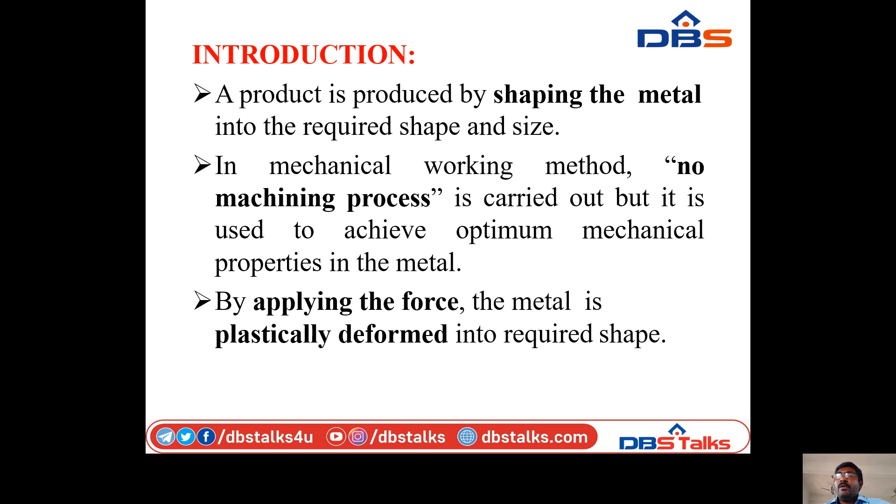By applying the force, the metal is plastically deformed into required shape. This deformation takes place when the stress caused in the metal reaches the yield point. The mechanical working reduces the cavities present in the metal and is also used to remove the impurities. The wastage of material removal is negligible or too small, and production is high when compared to other manufacturing processes.

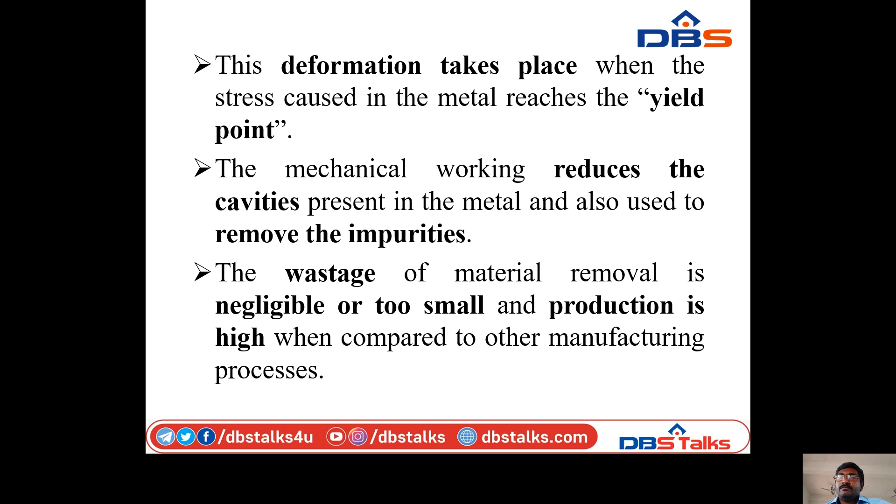Plastic deformation. If the solid body is loaded beyond the elastic limit, the body will experience a permanent change in shape and size when the load is removed. Plastic deformation of metal and alloys is generally studied under two categories, namely plastic deformation of single crystals and plastic deformation of polycrystalline materials.

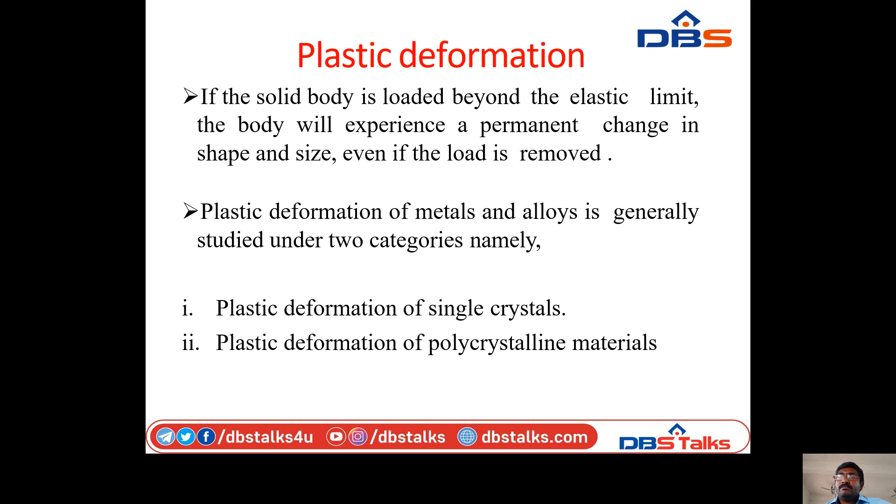So, plastic deformation of single crystals. Plastic deformation of single crystals involves the study of one single crystal and observing how it behaves under stresses. A single crystal is nothing but a single grain and has no grain boundary. Plastic deformation in single crystal may take place by slip, twinning, or a combination of both.

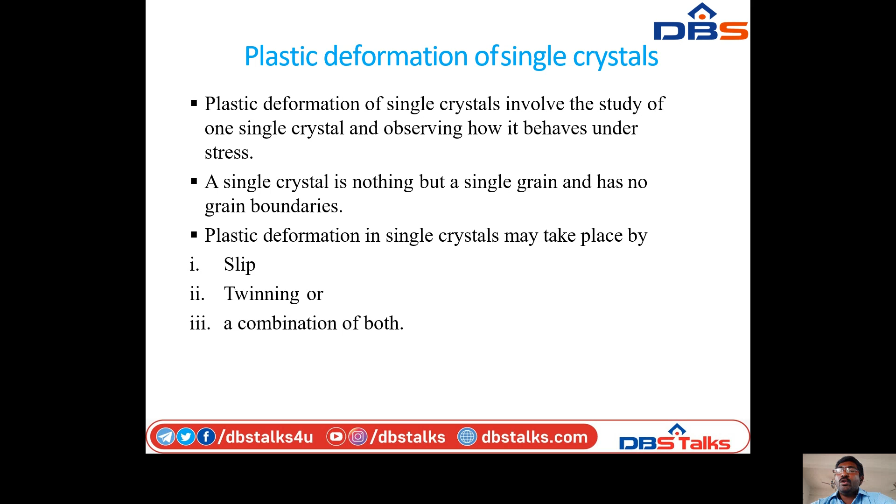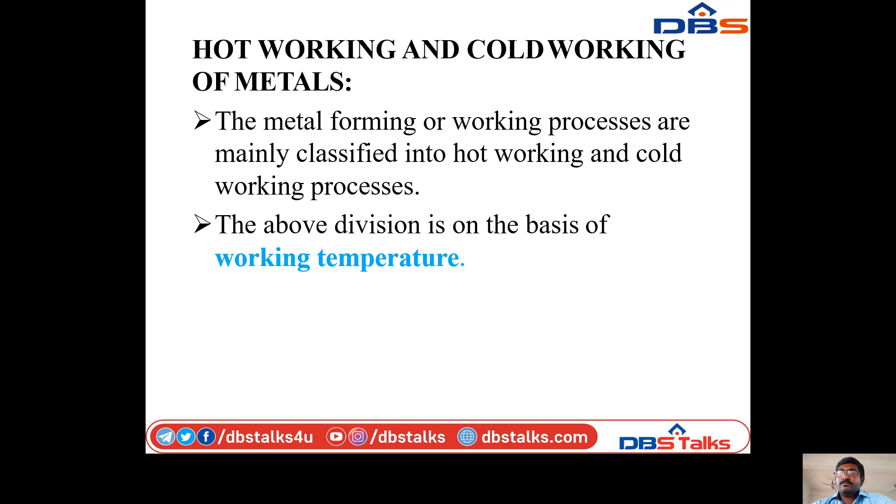Next, hot working and cold working of metals. The metal forming or working processes are mainly classified into hot working and cold working processes. The above division is on the basis of working temperature. Hot working of metal. The mechanical working of metal above the recrystallization temperature but below the melting point is known as hot working of metal. The recrystallization temperature of metal will be about 30 to 40% of its melting temperature.

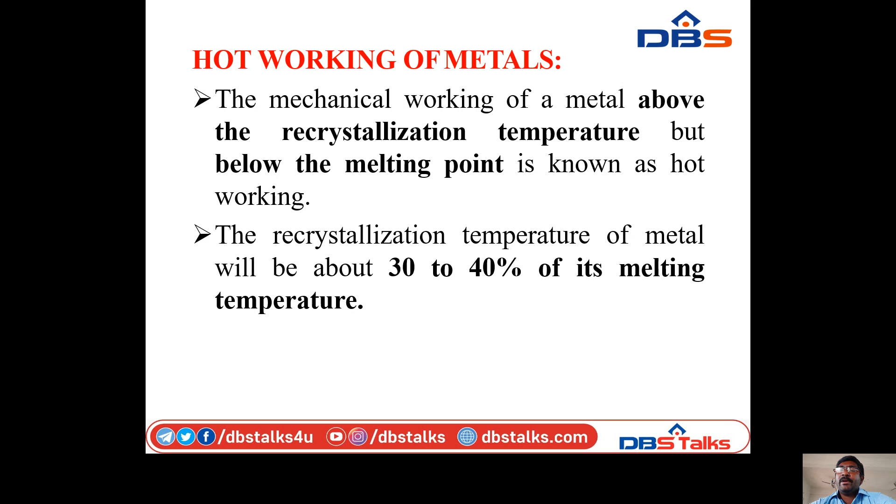So, hot working of metals, you can see the figure. So, grain size will increase in the hot working process. The increasing temperature is 1000 degrees centigrade. So, the diagram gives grain size and recrystallization temperature.

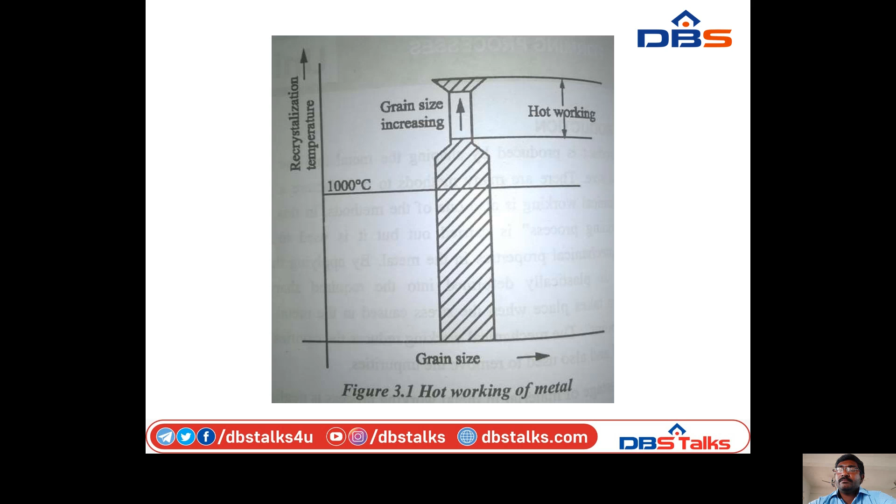So, semi-hot working or warm working. The drawbacks of both cold working and hot working processes are eliminated by this method of working. In this method, the metal is deformed under controlled conditions of temperature and strain rate. The ductility, tolerance, and yield strength factors should be considered for the selection of temperature and strain rate.

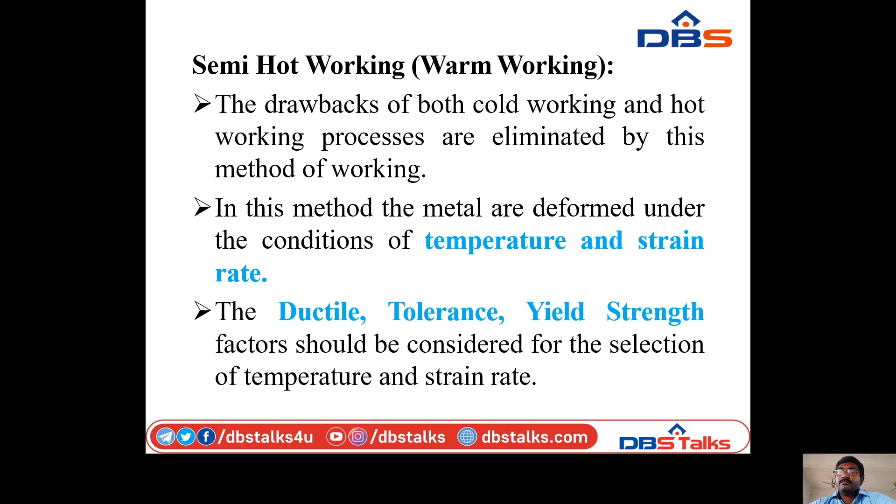The advantages of hot working. Force requirement is less when compared to cold working process. Toughness, ductility, and resistance can be improved. Quick and economical process. Porosity is eliminated and density of the metal is increased. It is suitable for all metals.

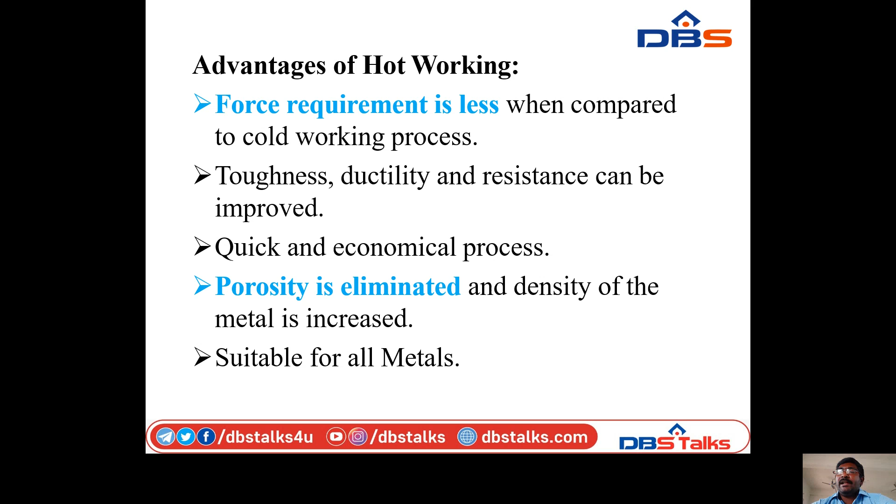Disadvantages of hot working. Surface finish may be poor, close tolerance and automation cannot be achieved due to high working temperature. Tooling and handling costs are high. Sheets and wires cannot be produced.

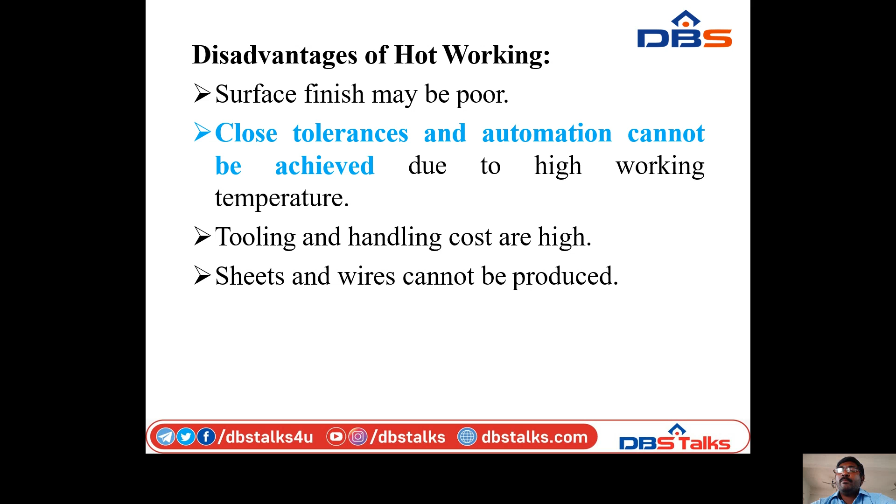Next, types of hot working process. Hot forging. It can be defined as a metal shaping process in which a malleable metal part known as billet or workpiece is worked to a predetermined shape by one or more processes such as hammering, upsetting, pressing, and so forth, where the workpiece is heated up to about 75% of its melting temperature.

So next type, hot extrusion. It is a production process used to form special steel profiles with a constant longitudinal cross section. It acts through a force called compression. This process can be employed to manufacture solid or hollow profile bars with complex geometry and fixed cross sections in a single step.

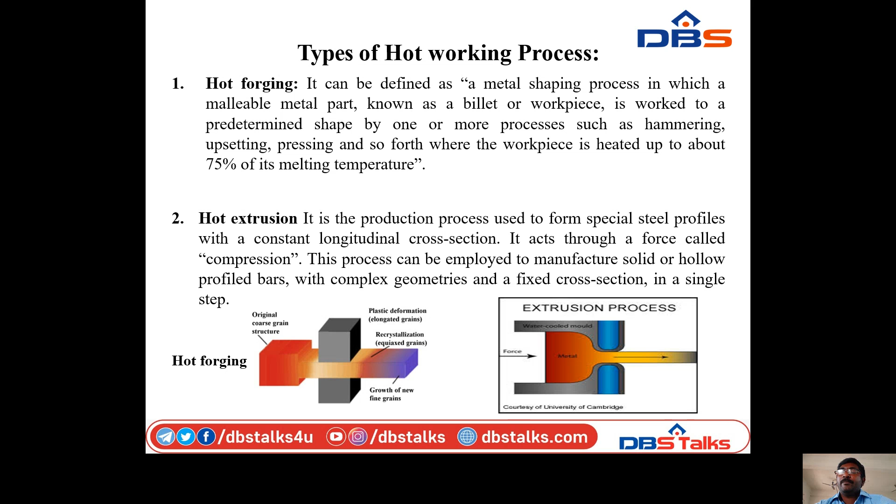Next, drawing. It is a metal working process which uses tensile force to stretch metal, glass or plastic. As a metal is drawn or pulled, it stretches thinner into a desired shape and thickness. For wire, bar and tube drawing, the starting stock is drawn through the die, is reduced in diameter and increased in length. So you can see the figure.

Next, swaging. It is a forging process in which the dimensions of an item are altered using dies into which the item is forced. Swaging is usually a cold working process, but also may be hot worked.

Hot spinning. It involves spinning a piece of metal on a lathe while high heat from the torch is applied to the workpiece. Once heated, the metal is shaped as the tools on the lathe press against the heated surface, forcing it to distort as it spins.

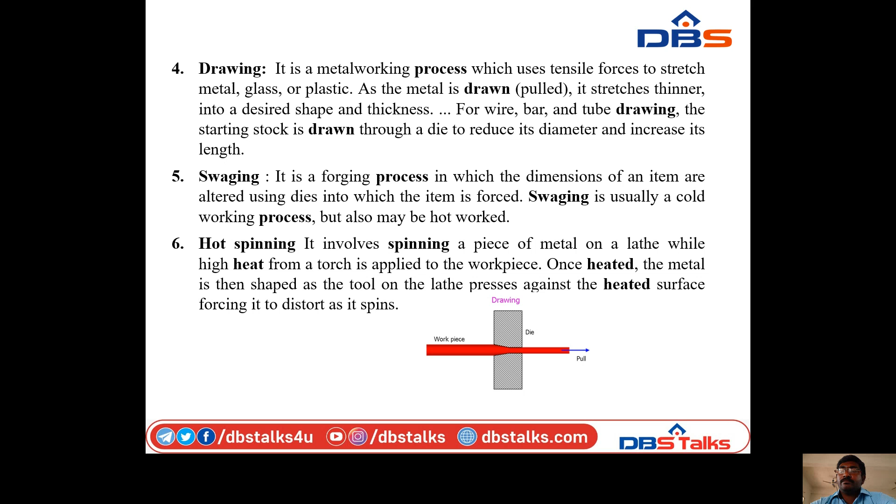Next, cold working. The plastic deformation of metal to the required shape being performed below the recrystallization temperature is known as cold working process. The recrystallization temperature is about half the melting temperature, but generally cold working is carried out at room temperature.

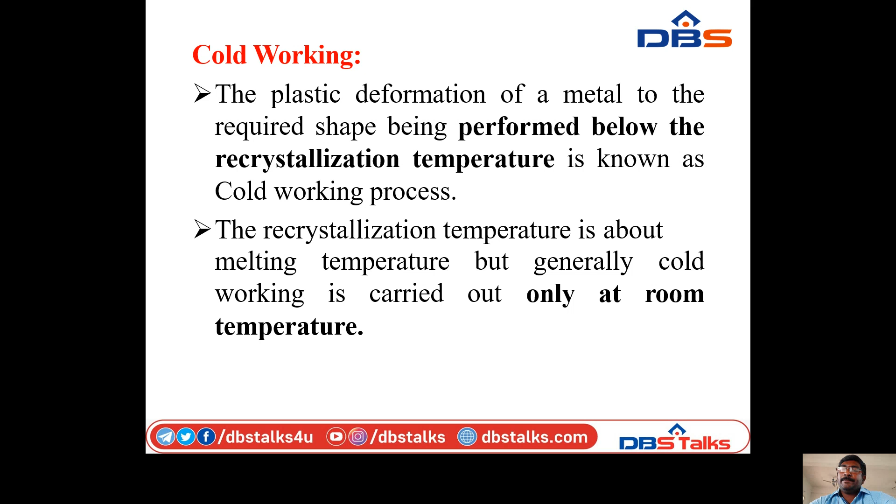So we can see the figure. Elastic deformation, plastic deformation, and load on the vertical line. Deformation is on the horizontal line. So you can plot a graph of yield point, maximum load, cold working, fracture.

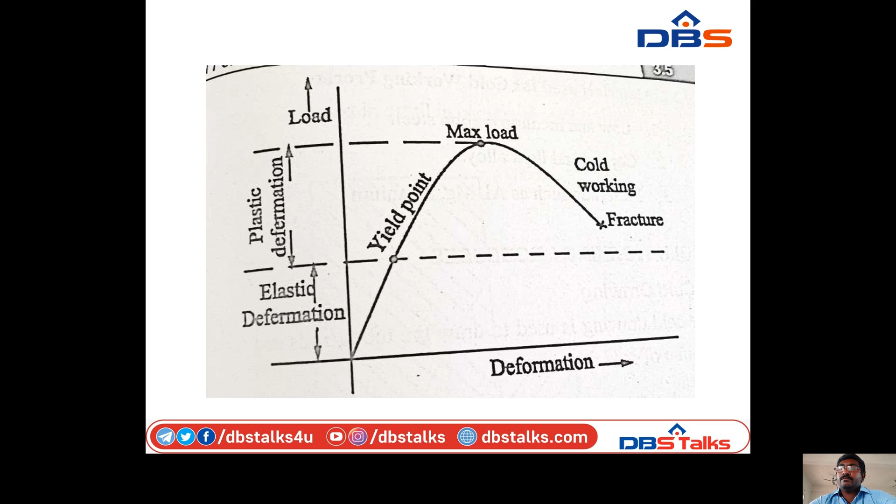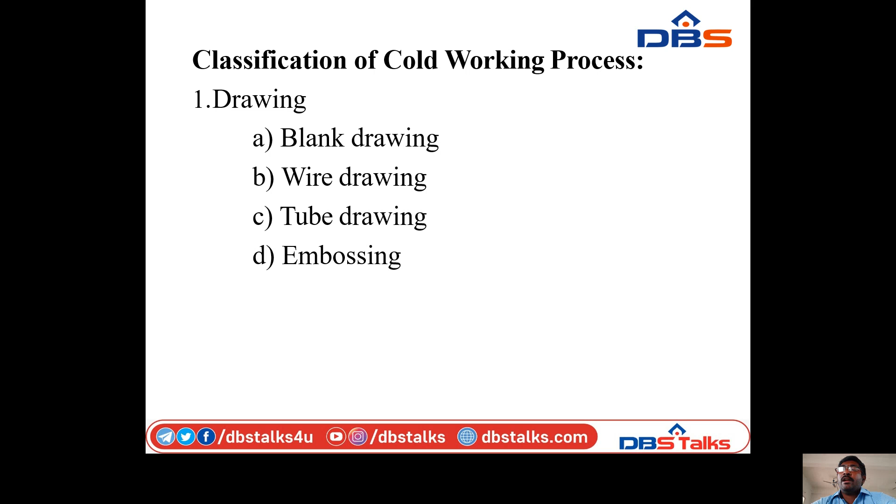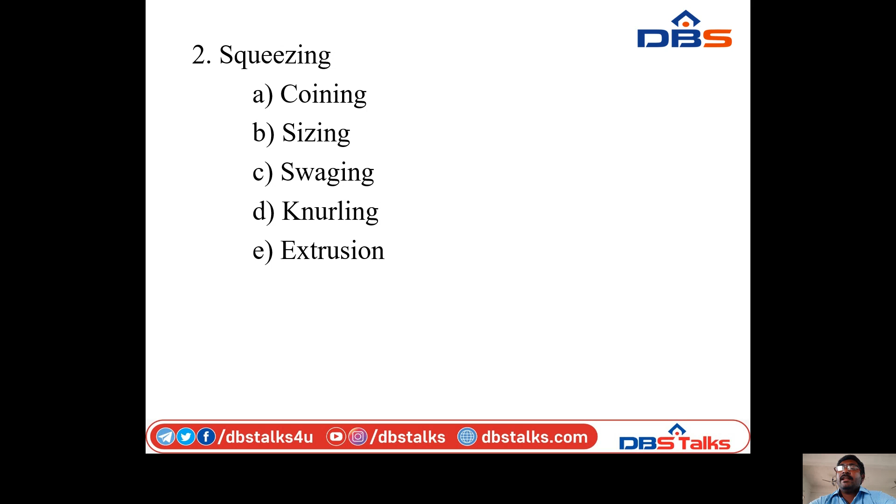The classification of cold working process. The drawing process. In drawing, we can divide it as blank drawing, wire drawing, tube drawing, embossing. Next, squeezing, coining, sizing, swaging, knurling, extrusion, bending, plate bending, roll forming, angle bending, seaming.

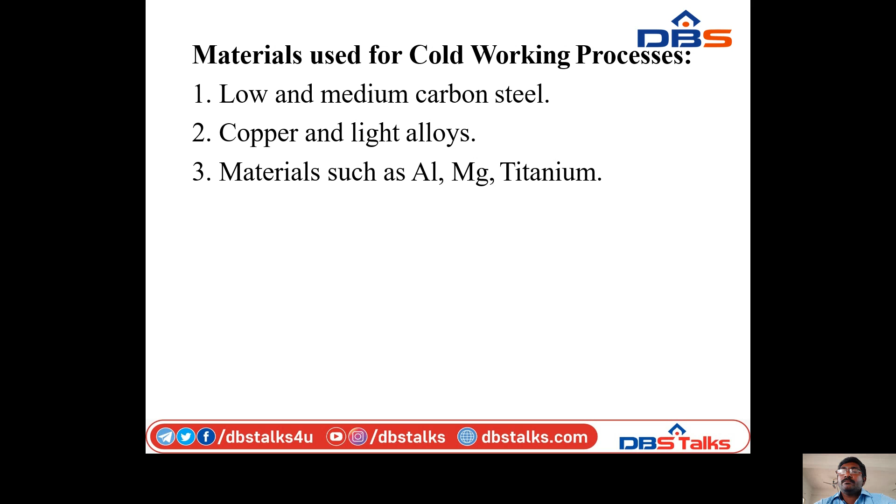So metals used for cold working process. Low and medium carbon steel, copper and light alloys, materials such as aluminum, magnesium, titanium, etc. Next, advantages of cold work. Widely applied as a forming process for steel, better surface finish is obtained, provides higher dimensional accuracy, thin material can be obtained, it's suitable for mass production.

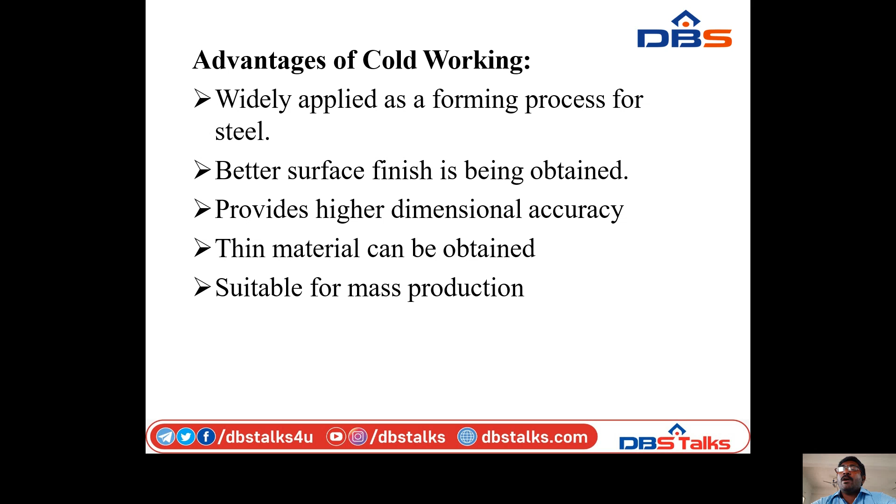Limitations. The surface finish may be poor, close tolerance cannot be achieved, stress formation in the metal during cold working is higher.

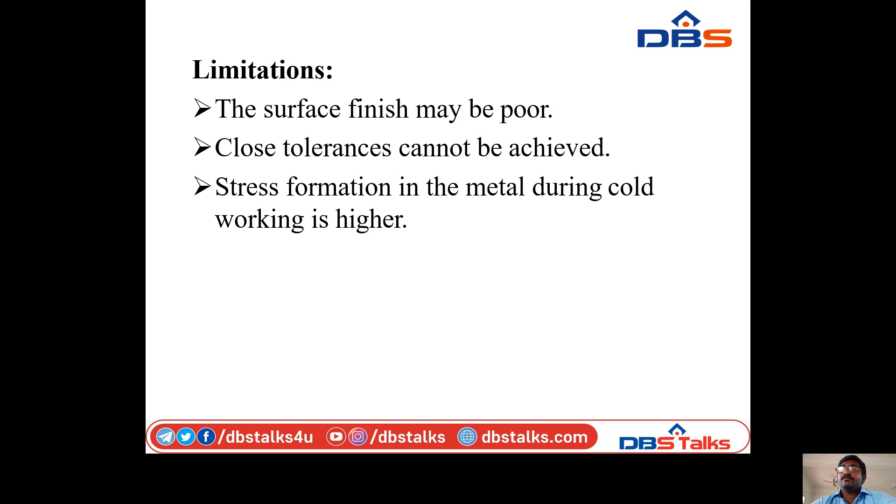Comparison between hot and cold working. Working above recrystallization temperature is the hot working process. Below recrystallization temperature is the cold working process.

New crystals are formed after hot working, but no recrystallization occurs in cold working. Hot working hardens the metal, but there is no hardening in the cold working process.

Impurities are removed from the metals in the hot working process, but impurities are not removed in the cold working process.

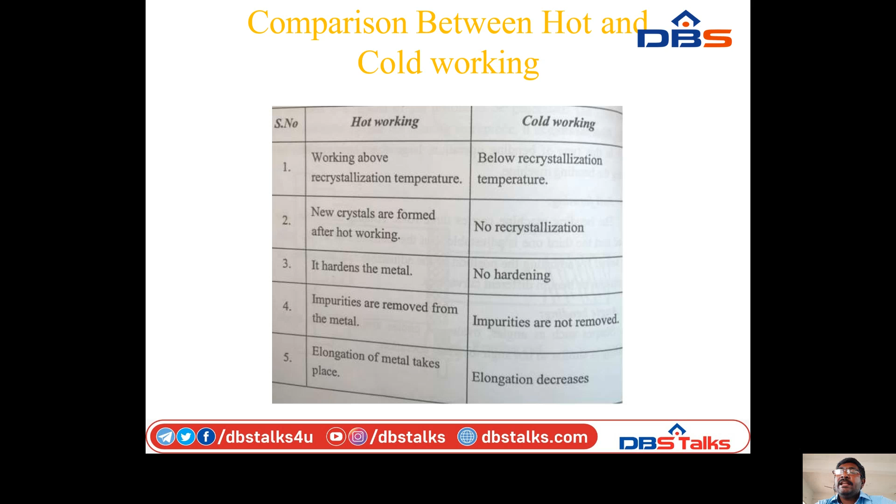Elongation of metals takes place in the hot working process, while elongation decreases in the cold working process.

Large size metals can also be deformed in hot working, but this is limited to size in cold working. Surface finish is not good in hot working, but good surface finish can be obtained in cold working.

Blowholes and cracks get welded during the hot working process.

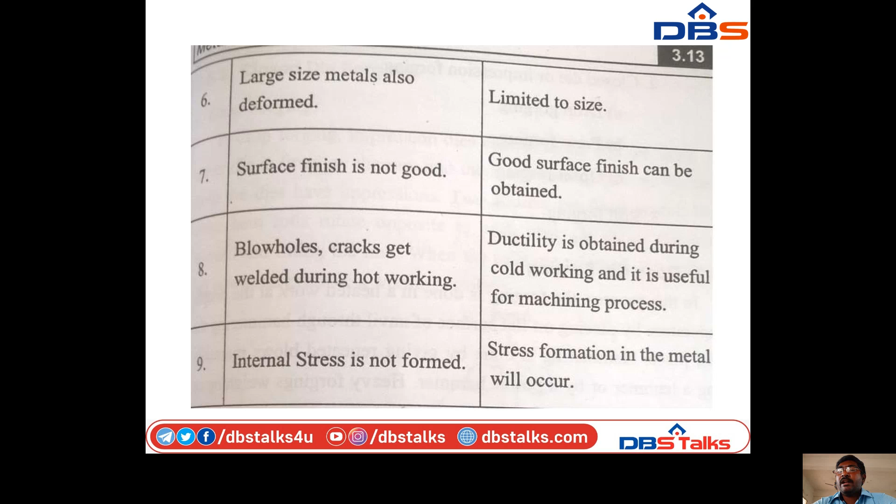Ductility is obtained during cold working and it is usable for machining processes. Internal stresses are not formed in hot working, but stresses form in the metal while using the cold working process.

Next, classification of sheet forming. Sheet metal forming involves forming and cutting operations performed on metal sheets, strips, and coils.

The surface area to volume ratio of the starting metal is relatively high. Tools include punch and die that are used to deform the sheets.

We can see the above diagrams: bending sheet, deep drawing, and shearing.

Bending: in this, the sheet metal is strained by punch to give a bend shape or angle shape, usually along a straight axis.

Deep or cup drawing: the formation of the flat metal sheet into a hollow or concave shape like a cup is performed by stretching the metal in some region. A blank holder is used to clamp the blank to the die.

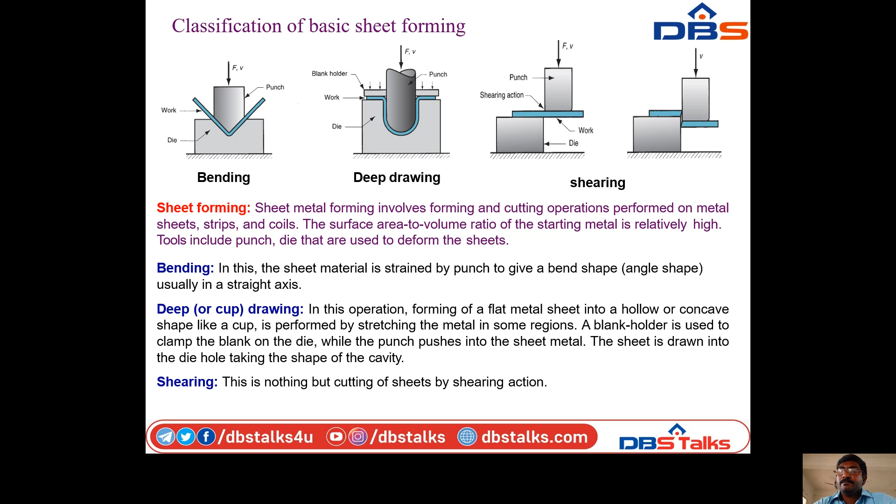Rolling: rolling is a metal forming process in which the thickness of the work is reduced by compressive force exerted by two rolls rotating in opposite directions.

Flat rolling is shown in the figure, with a similar shape. Rolling can also form a square cross section into shapes such as an I-beam or L-beam.

Important terminologies: bloom, slab, billet. A bloom is a square cross section of 150 mm by 150 mm or more.

A slab is rolled from an ingot or a bloom and has a rectangular cross section of 250 mm width or more, and thickness of 40 mm or more.

A billet is rolled from the bloom and has a square cross section with dimensions of 40 mm on its side or more.

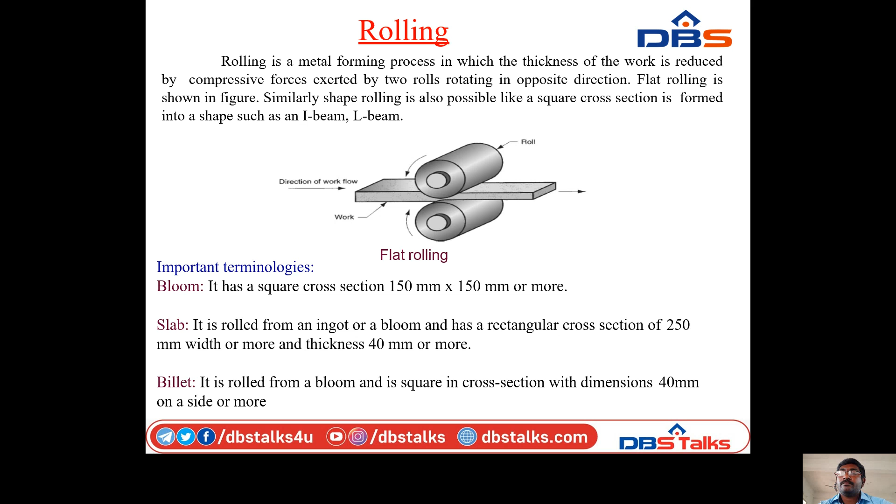Blooms are rolled into structural shapes like rails for railroad tracks.

Billets are rolled into bars or rods. They become raw materials for machining, wire drawing, forging, extrusion, etc.

Slabs are rolled into plates, sheets, and strips.

Hot rolled plates are generally used in shipbuilding, bridges, boilers, welded structures for various heavy machineries, and many other products.

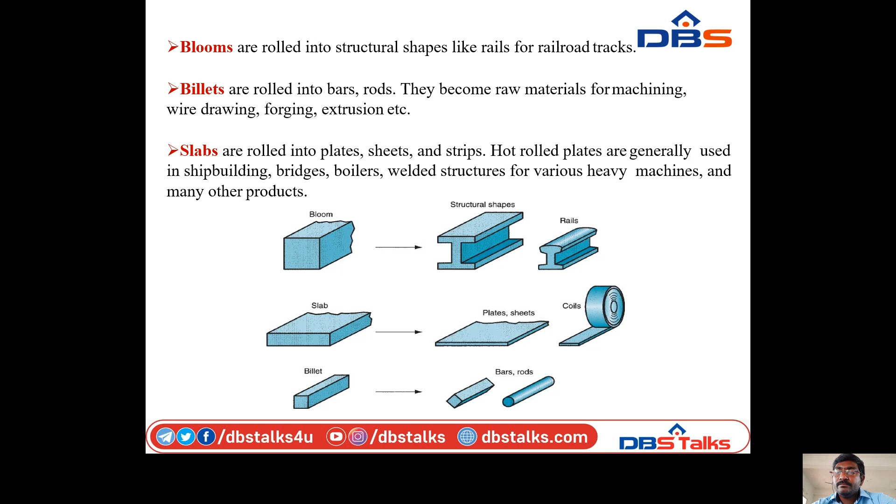The plates and sheets are further reduced in thickness by cold rolling to strengthen the metal and permit a tighter tolerance on thickness.

An important advantage is that the surface of the cold rolled sheet does not contain scales and is generally superior to the corresponding hot rolling product.

Later, the cold rolling sheets are used for stampings, exterior panels, and other parts used in automobile, aerospace, and household appliance industries.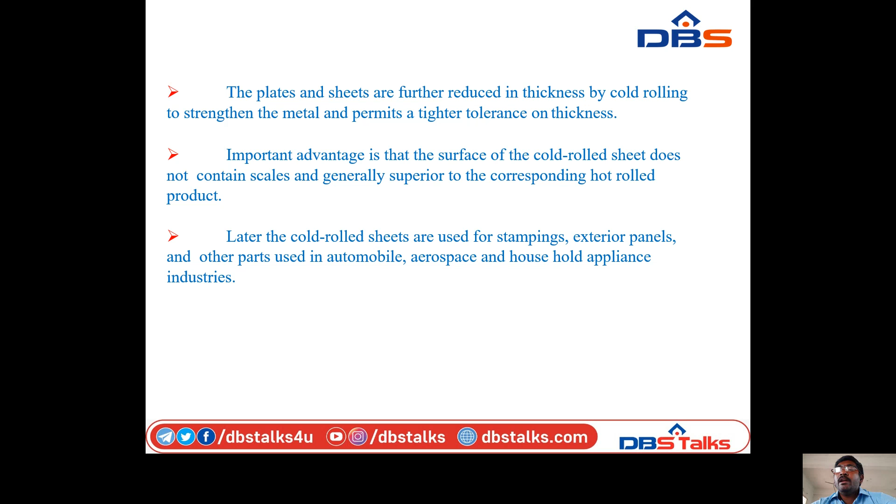Rolling mills: two-high rolling mills. This type consists of two rolls rotating in opposite directions, with roll diameter 0.6 to 1.4 meters.

Type is either reversing or non-reversing.

Non-reversing mills: rolls rotate only in one direction, and the slab always moves from the entry to the exit side.

Reversing mills: the direction of roll rotation is reversed after each pass so that the slab can be passed through in both directions. This permits continuous reductions to be made through the same pair of rolls.

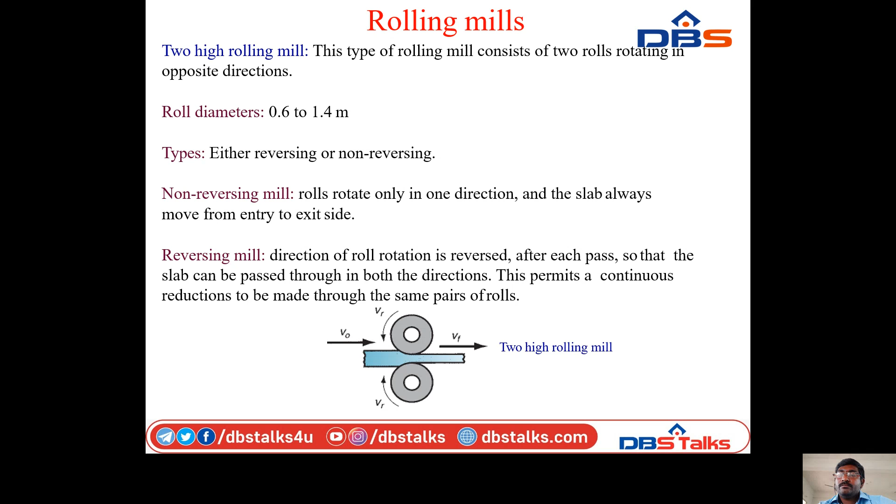Next, three-high rolling mills. In this case, there are three rolls, one above the other. For a single pass, two rolls will be used, and the roll direction will not change.

The top two rolls will be used for the first reduction, and the sheet is shifted to the bottom two rolls for further reduction. The cycle continues until the actual reduction is attained.

Disadvantage: an automated mechanism is required to shift the slab.

For four-high rolling mills, this consists of two small rolls for thickness reduction and two large backing rolls for support. The small rolls reduce the roll force required as the contact area is reduced. The large backing rolls are required to reduce the elastic deflection of the small rolls when the sheet passes between them.

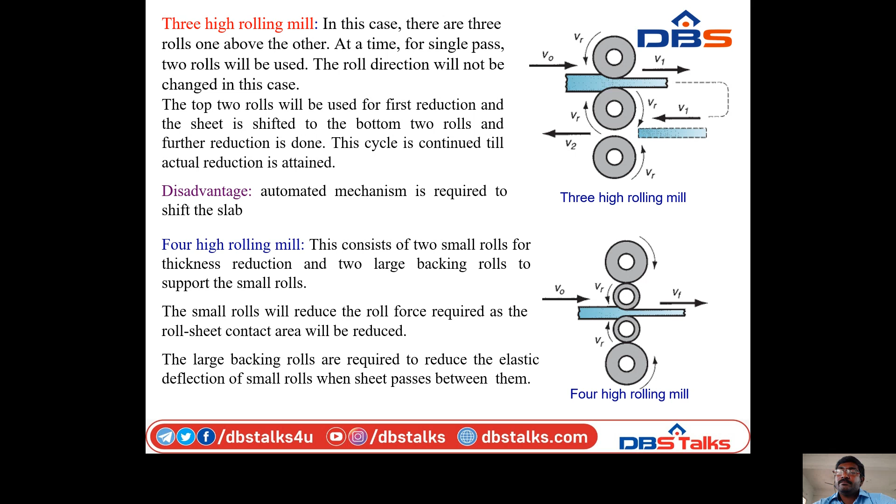Next, cluster rolling mill: this uses smaller rolls for rolling.

Tandem rolling mill: this consists of a series of rolling stations, of the order of 8 to 10. In each station, thickness reduction is given to the sheet.

At each rolling station, the work velocity increases. This is fully used in industrial practice.

Along with continuous casting operation, this results in reduction in floor space and shorter manufacturing lead time.

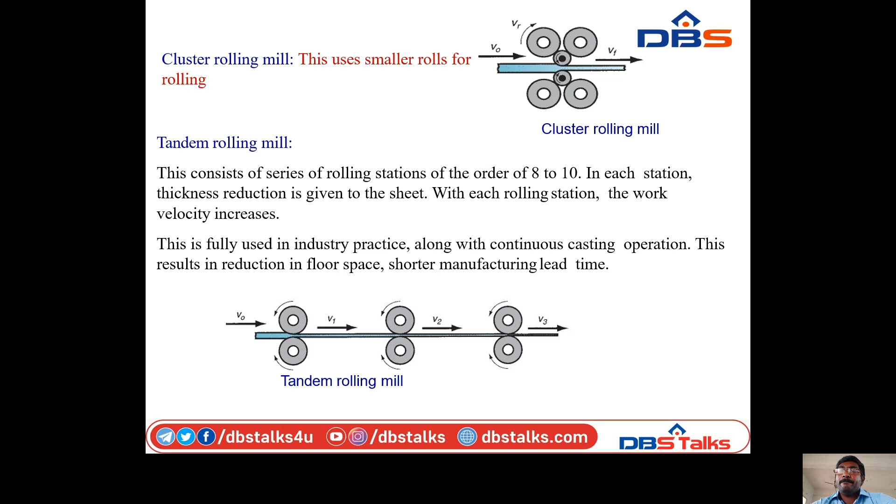Next, ring rolling. Ring rolling is a forming process in which a thick walled ring part of small diameter is rolled into a thin walled ring of large diameter.

As the thick walled ring is compressed, the deformed metal elongates, making the diameter of the ring enlarge.

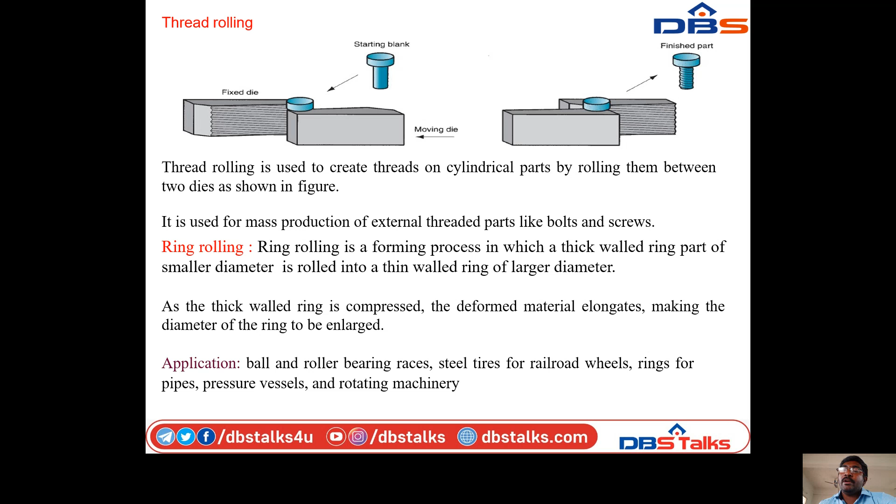Applications: ball and roller bearing races, steel tires for railroad wheels, rings for pipes, pressure vessels, and rotating machinery. We can see the diagram.

Next, defects in strip rolling: cracking defect, edge defect, waviness, light reduction, and heavy reduction. These are all the defects in strip rolling.